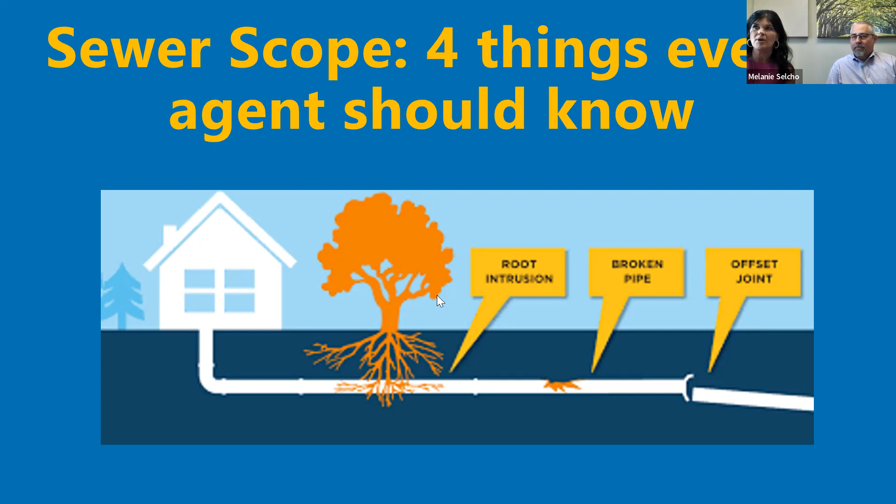So anyway, sewer scoping is probably the trendiest thing happening in home inspection world right now. We almost sell out every week since introducing the service. And so today you are going to learn what you need to know about sewer scoping. So, 4 things that every agent should know.

Before I get there, I'm going to tell you a little bit about what we know about home inspection in general. And what we know is that nobody wants the thing we sell, which is a home inspection report. Nobody gets excited by hearing, guess what, I'm going to give you 50 to 70 pages of stuff that's wrong with the house. But what buyers do want is certainty. They want to know that they're getting the house they think they're getting, and they essentially want to know that they're getting their money's worth. And so we will talk about how the sewer scope helps them get that certainty today.

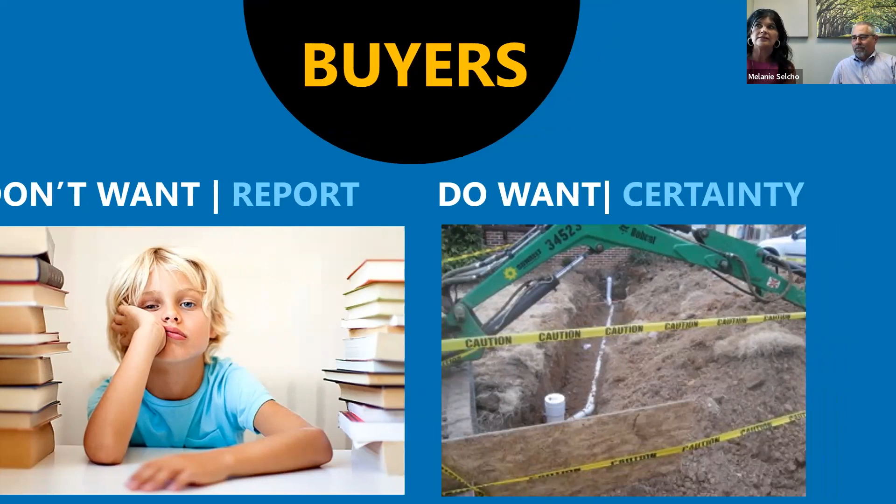So today, these are the 4 things, going back to journalism school for me: the who, what, where, when, and why. What is sewer scoping? We'll talk about that. We will talk about why home buyers want us to do it, those are your clients and our clients, who we recommend it for, and what's next in terms of anomalies and limitations and the things that you see in the actual report.

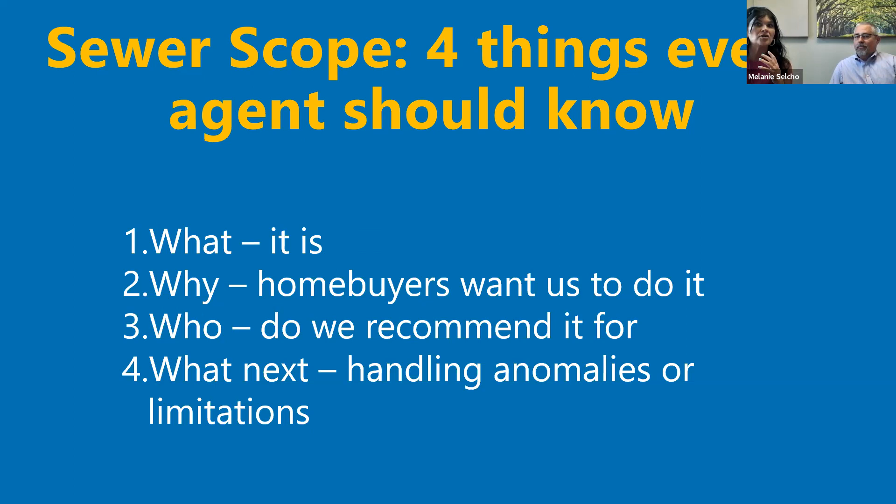So by the end of this webinar, you will be able to really advise your clients or to tell them to call their home inspector to get better advice, but you'll be able to really sort through that report and give them some better information about knowledge that's available to them and whether it would be applicable for their situation or not. So with that, Jason is way smarter about this than I am. Jason, tell us a little bit more about your background, and then tell us a little bit more about sewer scoping.

Wow. So background, I've pretty much been in field operations, whether in construction or maintenance, my entire adult life, either as a technician or managing, leading it. And so coming here to Home Probe, I am part of the operations, make sure the trains show up on time. And one of the things we've added is sewer scopes. So that falls under me, and we have a department of guys that go out and do sewer scopes here in South Carolina.

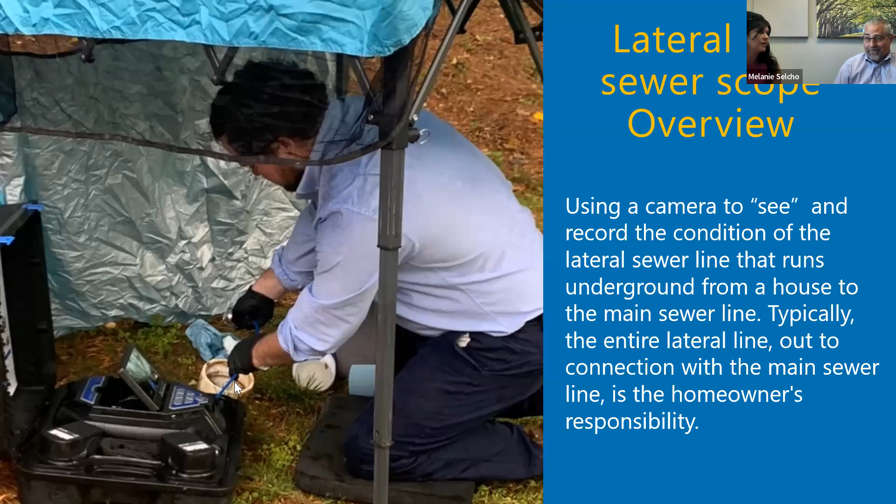The sewer scope is basically of the lateral line that runs from your house out to the main sewer. You can't see that, it's underground. And so we use the camera to go out and observe and take pictures and see what the status is of that line, especially since the lateral line is typically the homeowner's responsibility. Okay, so this is a picture of Chandler literally putting the scope down the clean out. Yeah, so we enter through a clean out, and that's how you get into it.

So as far as steps go, we do a couple things. First thing is find the clean out. That can be a challenge with pine straw. Sometimes it's in the front yard, sometimes it's in the crawl space or the basement. So that's an interesting part of it that you wouldn't think can be an issue. We also measure from the clean out to the street for a reference point. So we have a counter on the camera. We know how far out it is. It just gives you a better understanding of where you're going before you hit the sewer line.

Once we have that done, we'll set up the camera, feed into the clean out. And then the way we do this is we video out to the main sewer, stopping and making notations for anything that we note, whether it's a change of pipe or whether there's something wrong. Then on the way back, we stop and take detailed pictures of that for the report. So we video on the way out, observe on the way out. If you request a video from us, you'll notice it stops at certain things and we'll turn around. That's the inspector writing down notes of that footage and what's going on at that footage.

On the way back, after we've notated them, we pull the camera back, stop recording, and now start taking pictures. We're looking for anomalies, junctions, material changes, that sort of information. Clean up the camera, clean up the work area, make sure everything's good, write the report, and then send it out. Awesome.

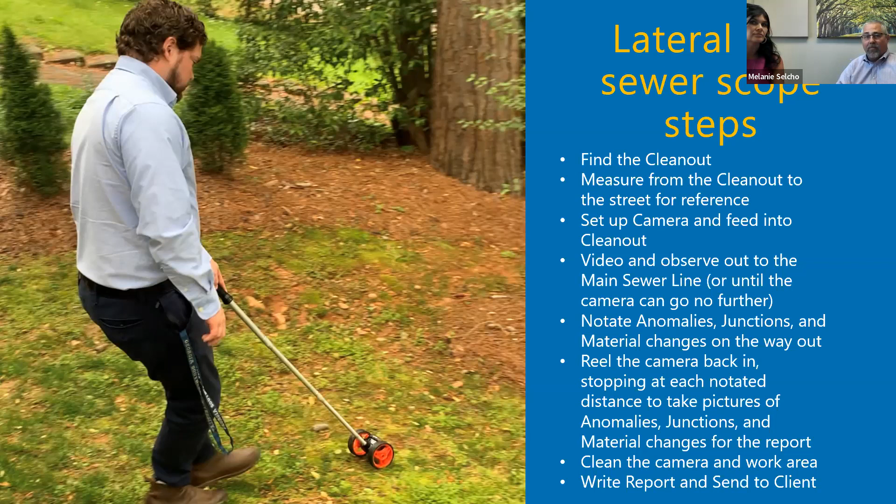All right, very good. So I got to follow Chandler, one of our field service techs, doing one, and it was really fun. And I took a video so that you could see a little bit of what the camera looks like as it is being used. So now you're going to see how bad I am at Zoom as I go from one screen to another. So bear with me for just a moment. But I'm going to share this video of the sewer scope camera so you can get a little better idea of what's going on here.

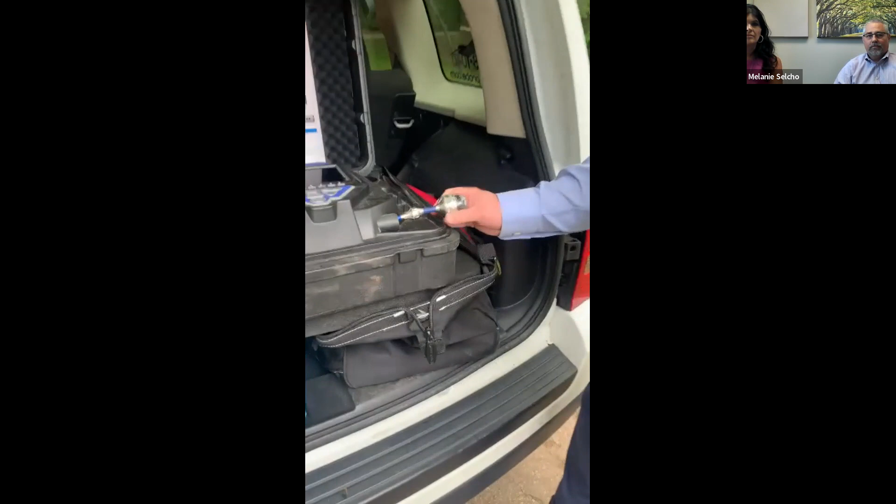So here is the piece of equipment. It's the Wohler VIS 350, and we utilize this camera because it has a pan and tilt head, which allows us to see a lot more than you normally would from a traditional camera head that doesn't move. And what does that mean? It moves around? Yeah, it's flexible. And the pan and tilt portion is this portion of the camera, which we can turn with these buttons. So a traditional camera head would not be able to see into corners, to see up and down. It would just be looking straight ahead.

So our camera has the capability to look around corners, look up and down at different angles to see important things like cracking or offsets or any pipe bends. It can look into where those may be coming from. Like, let's say we come to a T, you can look to the left or right and establish which direction the sewer line's running. So that's a really important aspect of this camera. And also it has great visibility, very high quality, which is very important when looking for things like those cracks and separations that you might not otherwise see.

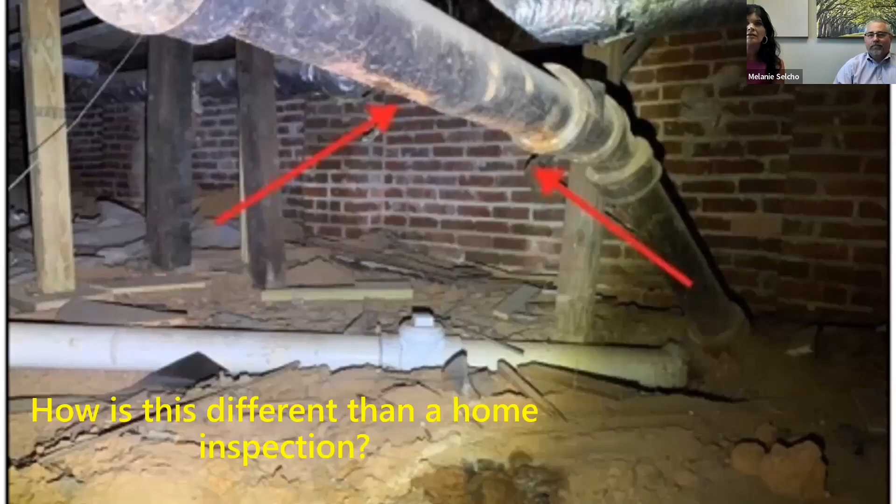So that was Chandler explaining the camera, which I think is really helpful information. Now let me go back to my screen that I wanted to share with you. All right, so give me just a second.

All right, Jason, let's go back to you. Tell us how this is different than the home inspection. Why is this a separate event? Well, on a normal home inspection, we can identify that there's cast iron. Sometimes the cast iron is changed up to the house or inside the house, and yet it's still in the yard. If you look in this picture, we can identify there's a leak, but we can't tell you what's going on inside of it, and we can't tell you what's going on under the ground. So when it leaves the house, we can't see it anymore. From the house to the sewer line, it's anybody's guess, and there's no information to provide you to make a decision on.

So this is what we used to say when we saw cast iron. We didn't have availability for anything more than this, which is essentially you have an expensive repair coming your way, maybe sometime in the future. And so how does sewer scoping change that?

Well, it gives you actual visual, I want to say facts, but reference points to look at it and say, hey, there is more than just I have cast iron and it needs to be fixed immediately, or someday or in the future. You can see how much, if it's cast iron and it's scaling, if it's cracked, you're actually able to look at that and make a much better informed decision on what you need to do.

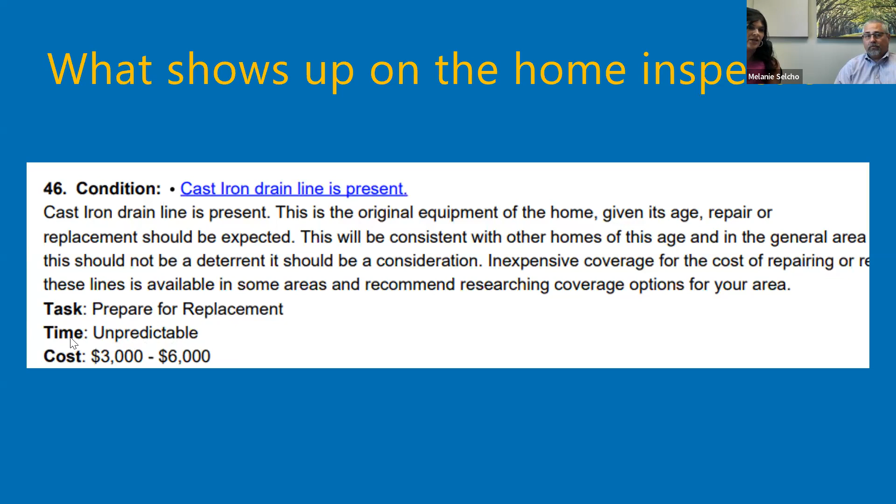You can also take that information, go to an independent plumber or a plumber that is a vendor recommendation by us and say, here's what I've seen. What do I do with it? And get good information. So we can't change the fact that you have cast iron. The sewer scope doesn't change that, but it helps us with this unpredictable piece to give you a little bit more information on the condition of that cast iron and when you might expect problems.

Because why do people want us to do this, Jason? Nobody wants to see inside their sewer, right? Why are people wanting us to do this? Well, because nothing bad ever happens at 10 o'clock in the morning on a work day when you have the ability to go fix it. Nobody wants sewage backing up into your shower when something bad happens, or for that matter, other places, right? Out of your washing area, your laundry area, or whatever.

And it's easier to plan for something and know it's coming than to have an unexpected, now we have to have somebody tear up my yard, dig all this up, and it's all reactionary, panic, high stress, instead of a planned event. High stress and messy. I think messy. You combine the two worst things for new homeowner surprises, gross and expensive. So that's why people want to know about the sewer scope.

So we'll show different examples, but tell us, if there's nothing wrong, what are we seeing with the sewer scope? What is in the report? So at the very least, if there's nothing wrong, you're going to know what material you have. You're going to understand if it was installed correctly. For instance, if you dig a trench and your trench is not even, and then you lay a pipe in there, if you have a low spot or that's not compacted evenly, you're going to have ups and downs in your pipe. So you're going to understand how it's installed and also the condition.

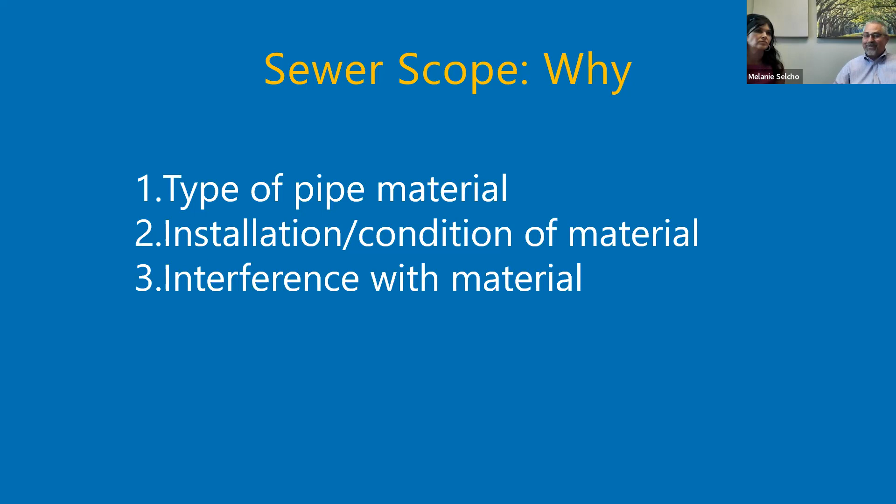If you didn't put two pipes together correctly, you're going to be able to see that. And then you're going to find your obstructions, your roots that are growing into cracks, obstructions, stuff that gets caught in there. Let's start looking at some of the fun stuff that we find.

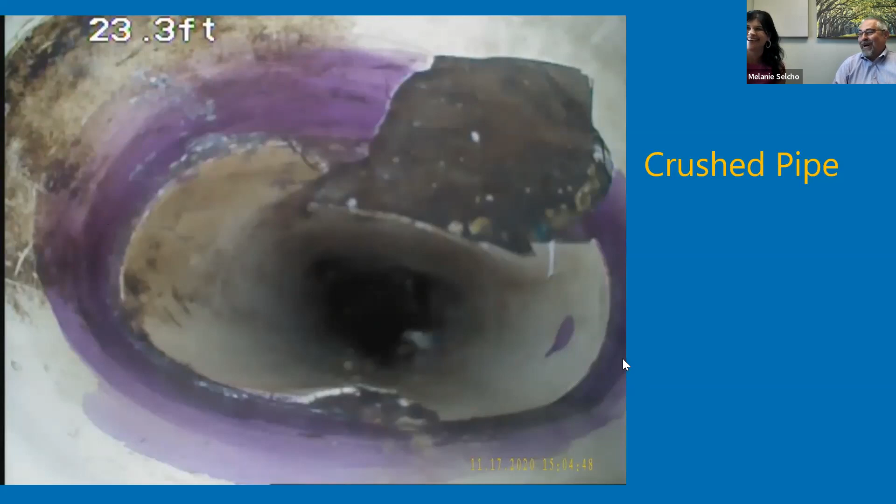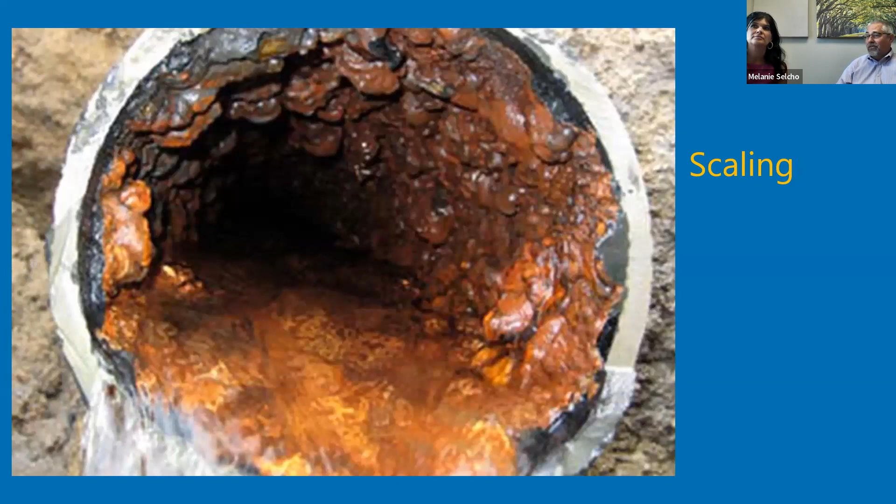Ooh, what's this? This is cast iron, and cast iron as it gets older scales. This is the clearest example I could find, but we have found examples of a 4-inch pipe with about a 1-inch hole in it because the scale built up so much. As you can imagine, eventually something's going to clog up in that, and then you have all your bad things happening.

Those are some of the stories I'm hearing when I go to real estate offices, particularly with the rehabs and the renovations. So you take an older house, you put it down to its studs, you replumb it, and then the homeowner moves in, and now there's a lot of stress on that plumbing system from the house to the street. And so new homeowners, home buyers, as they move in, are having issues related there, which I'm sure you'll get to when we talk about our recommendations.

The one that I went to with Chandler, the agent actually told us that one of the things they were concerned about, it was one of these newer renovations, and there was a long front yard. I think it was almost 100 feet from the house to the street. And they wanted to know if the pipe changed. And sure enough, it did. It was pretty close to the street where it changed, but they didn't take the PVC all the way.

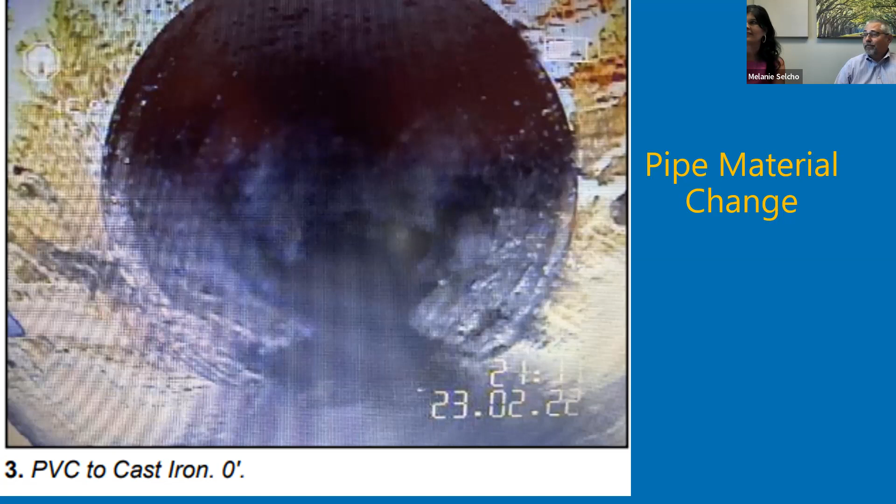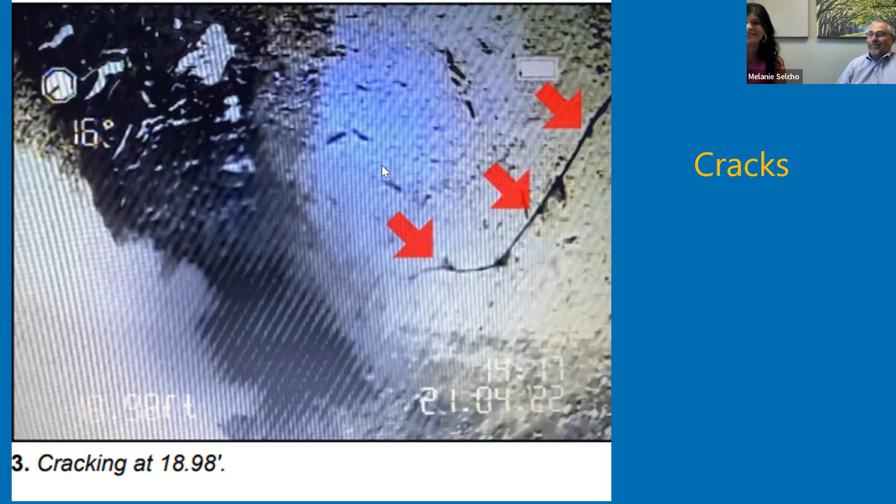But the other thing is roots. Roots are growing through cracks. So the chicken or the egg, what comes first? Depends. Sometimes the crack's going to come and a root can go through it, and sometimes roots will break through it searching for water. Okay, because trees want water. Yep. And constant flow. Even though we don't necessarily think about what's coming out of the sewer line as nutritious, a tree would.

So two things happen out of that. One, standing water, potential clog points, and two, you'll get, we're going to show you in a second, what's called an offset. As that pipe is kind of pulled apart, they don't line up correctly, which then creates a lip where they connect, where things can get stuck. And then once one thing is stuck, it moves on and gets larger.

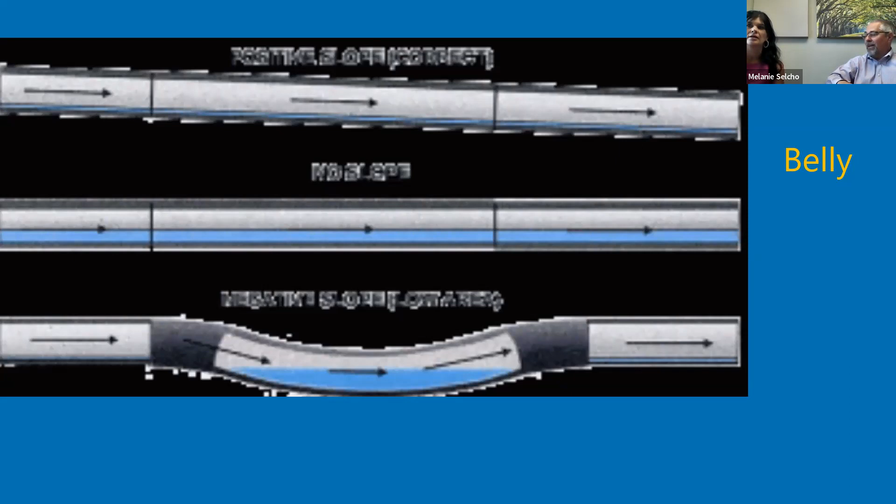Okay. And we're also asking the water to run uphill a little bit from the belly. Yes, so what happens is it'll only flow over the top. Heavy things will fall on the bottom, sit in your valley there, or your belly, and then you're constricting how much flow can go through there. Okay. Water does not like to go uphill. I have learned that.

And the purpose of that is we're not here to tell you how to fix something or what exactly needs to be done. We're giving the information, and that information can be taken to a plumber, and that way they can be a little bit more focused on their repairs for you. Okay? And so the belly is not as easily seen by still picture as it is by a video.

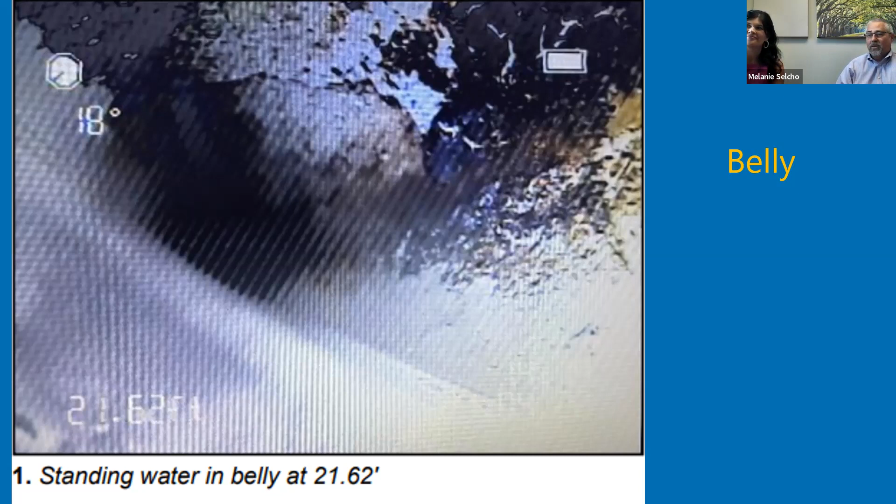It depends. Sometimes there are bellies that are pretty bad, and we have to pull the camera back to get a picture where you can see that it's not underwater the whole time. So it really just depends. But we also have videos upon request. We don't send them out with each report because not everybody wants them, and you get enough information through the pictures. But if you want the video, we can send you the video.

Okay. So this is what you were talking about, an offset. This is what it looks like in a correct diagram. So what ends up happening, and you'll see the dirt washed away underneath that, one pipe, normally the male part, well, it doesn't really matter, but one pipe will start falling down, which then breaks a little bit of the other pipe. But in the beginning, you'll see a lip as you go through with the camera, and you know that that's a problem that's happening.

And do those tend to continue? Like once it starts offsetting, is it like a retaining wall that starts falling? That's a tough one. Yes, but not scientifically. I can't give you the mathematical formula for that, but I can tell you that if a tree starts falling, it's eventually going to fall. If a retaining wall starts falling, eventually it's going to fall. No way to put a time frame to it though. Okay.

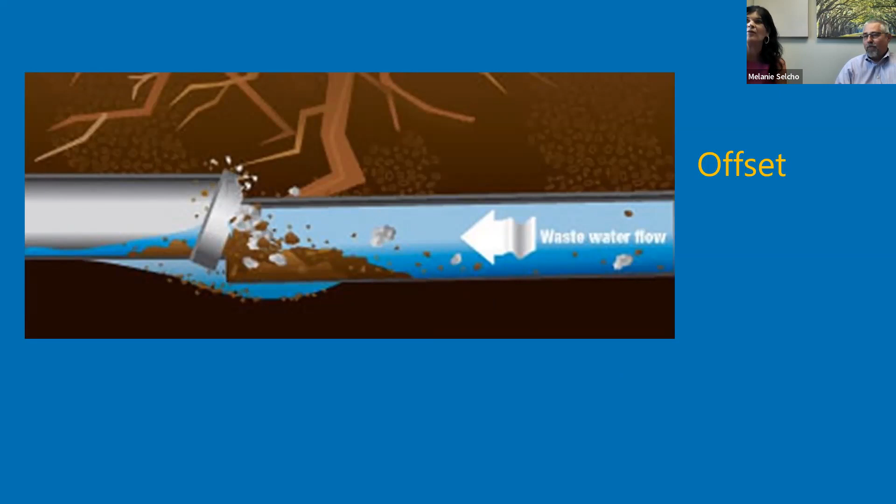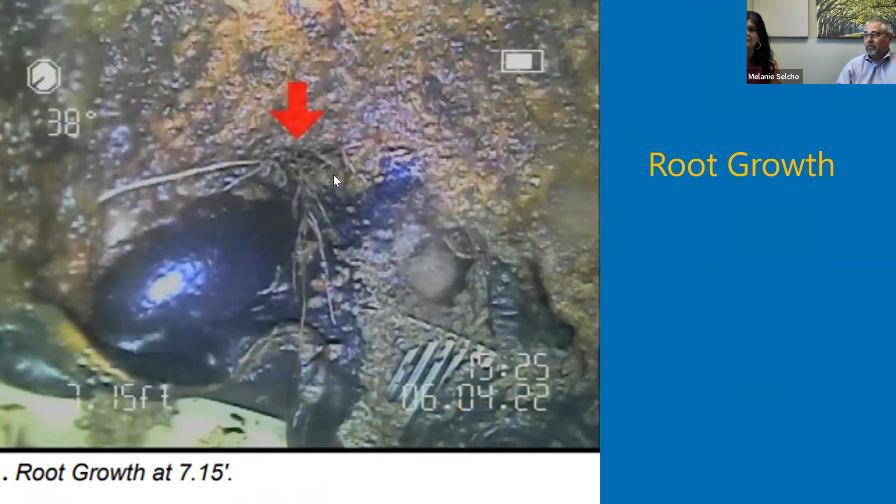What's this? This is part of a root. And you see them a lot. One of the things that surprised me when we started this is how much root growth we actually see. It's pretty common. It's fascinating to me because I'd heard of it, but to actually see the roots coming in there, I was like, wow, pretty interesting.

Another obstruction? Yeah, and we couldn't get past this one. It's not a bulldozer, it's an inspection camera, so if we come up to something and can't get past it, that's what's happened. So this one here where the red arrow is, there is something in there. It is blocking off 2/3 of the pipe. It's stuck there, and that has to be fixed.

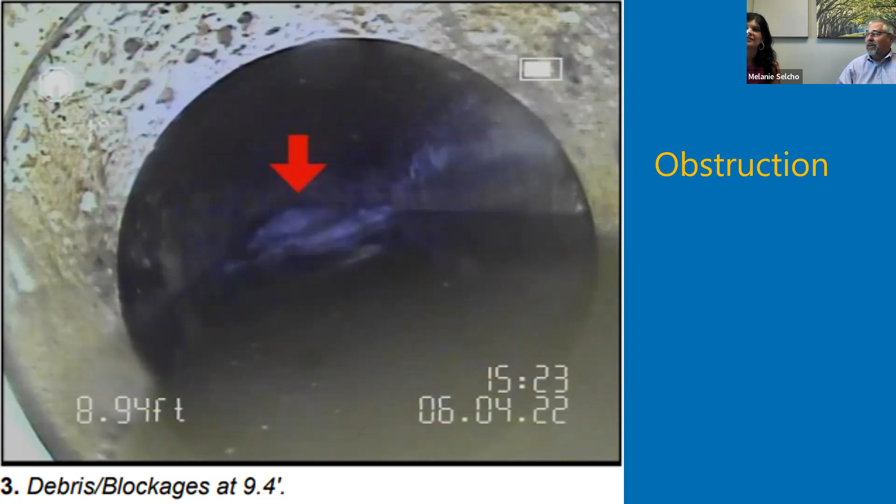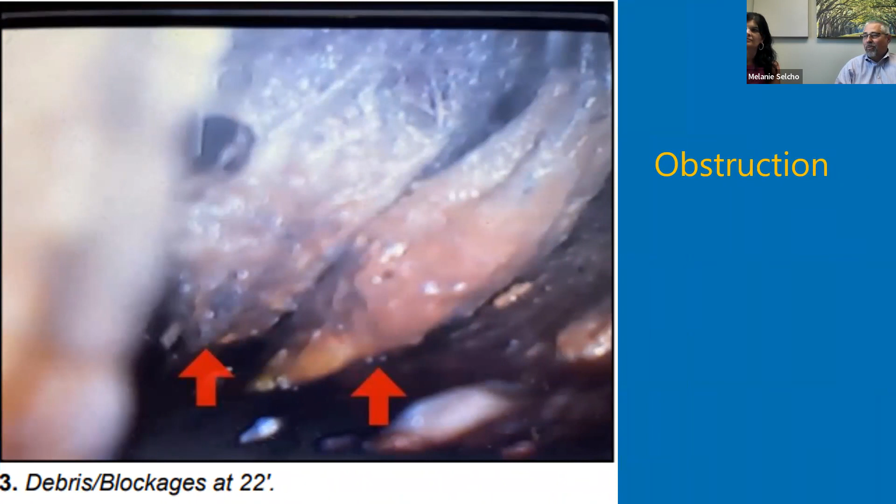You're going to be fine maybe for certain things, but once you get to a certain point, nothing's going to go past it. All right. Just a close-up picture of more debris and blockage in the pipes, keeping you from going through.

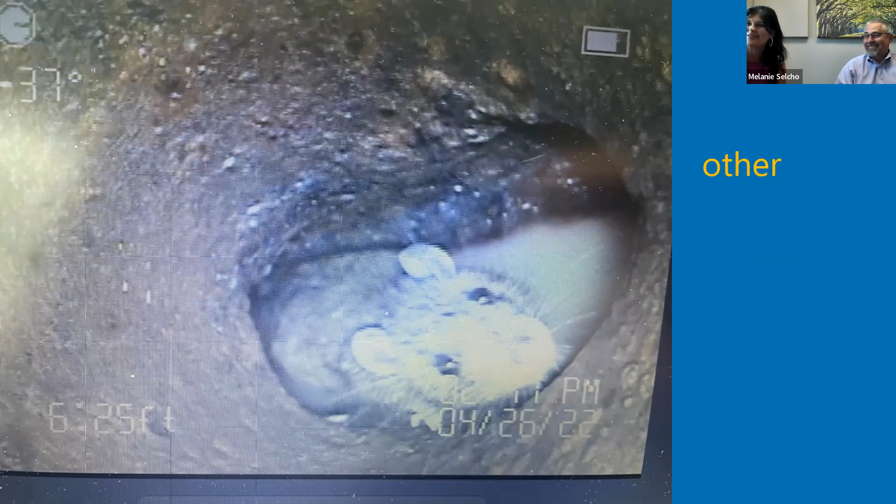What's this? So this was found pretty recently. We ran an inspection, came up to a T, and believe it or not, there was this, I wouldn't say little guy. I think the pipe we were in was a 6-inch pipe. I don't know how big that cross pipe is, but that's a fairly decent sized fella. I suggested that maybe our FST needed some hazard pay. Yeah, that's pretty scary.

All right, so those are the types of things we see, which I thought was the most important piece. Let's talk about when do we recommend sewer scoping for everyone? And if not, when is it a good idea? So we don't recommend it for everyone. If you want it, peace of mind is what you're getting with that.

You would think that if there's recent repairs, it doesn't make sense to sewer scope. But what we're noticing is people aren't fixing the entire line. If you have 40 feet between the front of your house and the street and something's found, they're fixing 10 feet, 8 feet. We have one we just went back to, and there was a root growth so large we couldn't get past it at 20 feet. They fixed from 18 feet to 24 feet.

The buyer asked us to come back out and verify and see if we could go all the way to the street, and we couldn't do it. We were able to go another 15 feet and hit more problems, and there are still roots in there. So signs of recent repairs may seem counterintuitive to scope, but it makes a lot of sense because a lot of people are doing the bare minimum. Right, you're fixing the first problem you see, and not necessarily all of the problems.

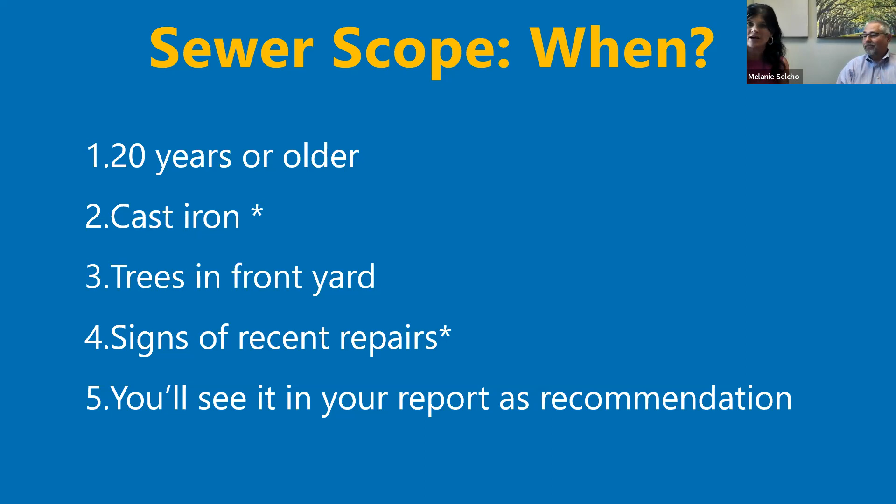In the plumbing section? Yes. Okay, great. And some of these people know ahead of time. Me as a buyer, at my house, when we had company come for New Year's is when our plumbing lines went out. So I now would never buy a house without having a sewer scope. So different buyers have different risk tolerances. If you've never heard me talk about that, I'll direct you to somewhere on our website where you can get more information.

Let's look at the descriptive pieces of the report. These are the things you're going to see in a report, even if none of the other stuff that needs attention is there. Our point of entry, why do we take a picture of that? Really, it's peace of mind for everyone. Most of the time, finding it is rough for us. If you have a report with a picture, maybe you save somebody else down the line a little bit of time. We take a picture also once the cap's put back on, for two things. One, make sure we didn't mess anything up and forget. Two, peace of mind for everyone.

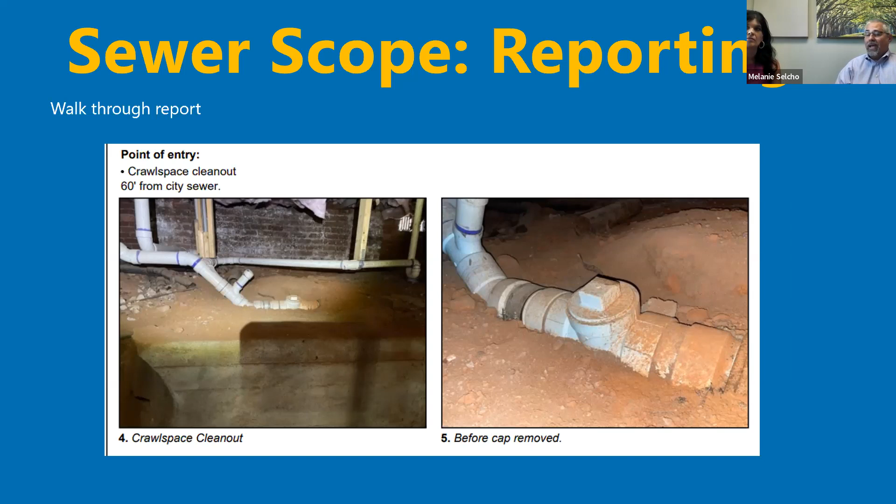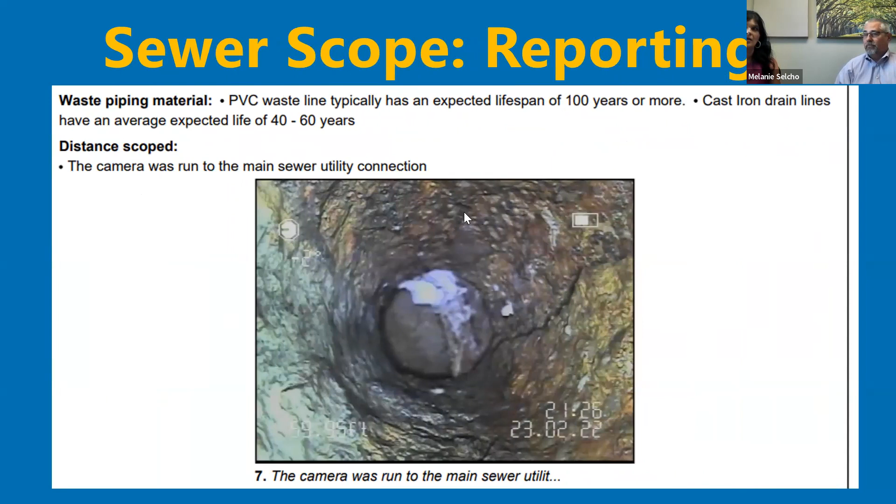At the very least, if there are no problems, what you're going to get out of a sewer report is where we went in, and your before and after pictures of your clean out. And then you're going to get every pipe junction. So if you start in PVC and then at 20 feet it goes to clay, at 30 feet it goes to cast iron, then at 40 feet it goes back to PVC, you're going to get a picture and a location of every one of those junctions just so you know what's underneath your ground. And then you'll get a picture of the furthest point scoped, which in most cases is going to be the main sewer line. So this just tells us we were able to get all the way to the main sewer line. Correct. All right.

So tell us, when does somebody want this and we can't deliver this product for them? So the things that we run into: we go out to do a sewer scope, and we'll run into times with no clean out. Either we can't find it, it's buried under mulch and nobody knows where it is, where we'd have to dig up a yard, or there's a bush planted right on top of it, and we're just not gonna do that kind of destructive stuff. Frozen clean out plugs: you get a cast iron clean out plug that has been there for 20 years that's rusted together, and we can't get it out. A plumber or the homeowner can cut into it, cut it out, and replace it. We're not going to do that because it's destructive.

You start getting into clean outs that are less than 3 inches in diameter. It doesn't happen much, but every once in a while you'll see a 1.5 inch clean out put in. We just can't get our camera in there to make the bend. And when you have clean outs more than 100 foot apart, code says they should be 100 foot apart. If we run more than that, there may be a portion, because of bends and slope, where you can't get to that next clean out. Or if you have a 200 foot line with no clean outs, we're only going to be able to go that 100 feet. T junctions, like where we saw our friend, the camera can't make a hard right. It has to be a pipe bend in order to make that transition. And once you start getting into multiple bends, 3, 4 90-degree bends, we run into problems being able to go any further than that.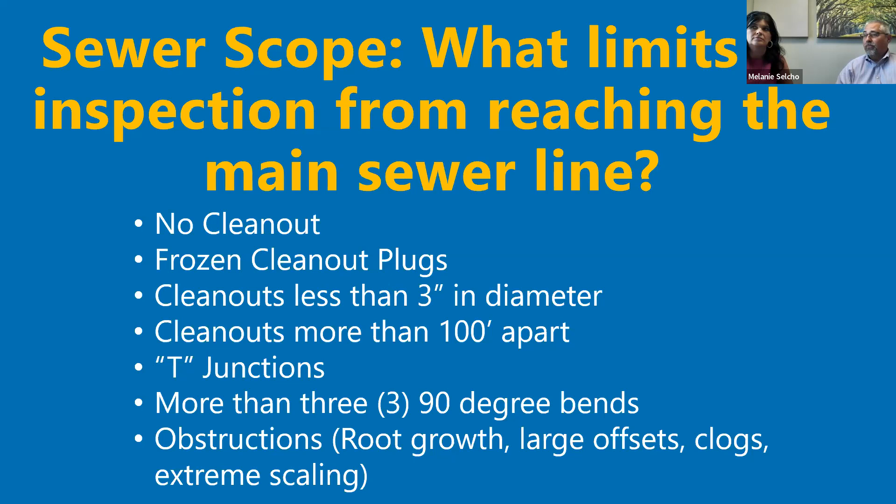And then obviously obstructions, root growth, large offsets. We have a 1.5 inch camera head. You'll see pictures where you have 1 inch of offset, and the camera just can't jump over that. Clogs, extreme scaling where the pipe is closed down too far for the camera to get through. Okay, so in those cases, what do you do? You're just out of luck? Absolutely, credit your money back. And then we're going to recommend Slam Plumbing. We have a vendor that does good work. They've done good work for our clients for quite a while. And they're able to do some things that we can't, whether it's pull a toilet or go through a vent stack.

They're plumbers. We're not. They're the specialists. Yes. We are the generalists. Speaking of Slam Plumbing, one of the things that I'm like, oh, wow, now that we have this report and our clients and our agents are getting this report, what do we do with it?

And we're again not plumbers. And so we have invited Slam Plumbing and they have accepted our invitation. We're just working on dates to come in and do a webinar on all of those things Jason showed you that we find, minus the rodents. What do they recommend, and what are some of the options? They don't all require a tractor coming to your front yard, but they're able to speak about that better. So watch for an email about when that webinar is scheduled.

We do these every Wednesday. So we're going to put them on our Wednesday schedule, and you'll be able to ask your questions about repairs to sewer scoping. And also speaking about these, what we call level 2 inspections, or the value adds that we have in addition to the regular home inspection. It seems like the buyer trend continues to increase in terms of the more they pay for the house, the more they want to know about the house, even if the seller is not going to do anything about it.